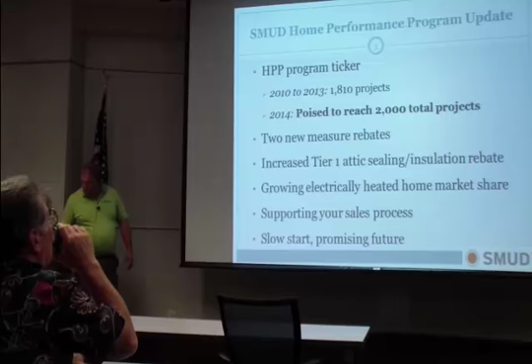All right, so let's go ahead and kick into the presentation. Most of you in the room have been involved with this since probably 2010. You started coming to these meetings when we were doing the grant, the stimulus grant and whatnot. Since then, we've taken care of 1,810 homes through the Home Performance Program, which is no small feat. That's pretty good. We're going to be over 2,000 by the end of the year.

Today we're going to talk about a couple new measures that we're adding into our program, which we think are pretty exciting. We're going to increase the attic air sealing insulation rebate per your suggestions from that survey. We're also wanting to reinforce the fact that we have this electrically heated home market, which is a very viable source of business for you.

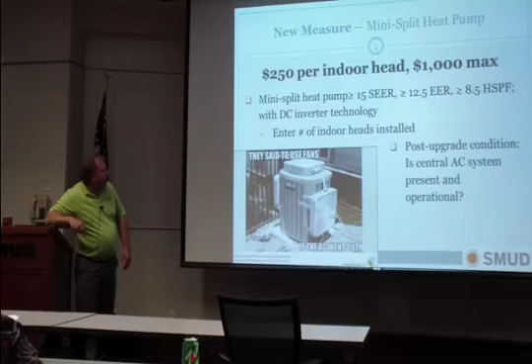Now, if you wish, you can install those as a measure under the home performance program only. So for anybody that wants to put one in, we're doing $250 with a max of 4 heads. You can, of course, put more heads in if that's what the house needs, but this is what we're going to max the rebate at—$1,000. There's the requirements. We're pretty excited about this.

We think that this actually fits a nice little niche in the market. So I'm hoping that those of you aware of mini splits should be pretty tickled pink right now, because now you can offer this as part of the home performance package. And I think you're going to have extremely happy customers if you do so.

It is strictly home performance at this time. We are in the process of trying to open this up to what we call our standalone rebate program, like the regular air conditioning program. But the one thing some of you may have figured out is that nothing really happens fast at SMUD. It takes time—there's an enormous amount of stuff we have to do and line up the ducks that need to be in rows before things happen. But because the home performance program is pretty quick and able to do things relatively fast, thanks to the excellent efforts of the team, we are able to do this.

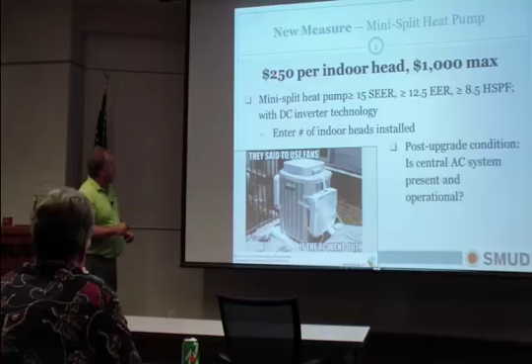Now, that's going to only be $200 for the standalone program, but you're probably still, we're going to miss the summer—I'm going to be honest, we're going to miss the summer for your standalone. But one of the things that those of you really closely paying attention may have noticed is that every time SMUD has anything to do with rebates, we always make it better to be a home performance contractor than a standalone contractor.

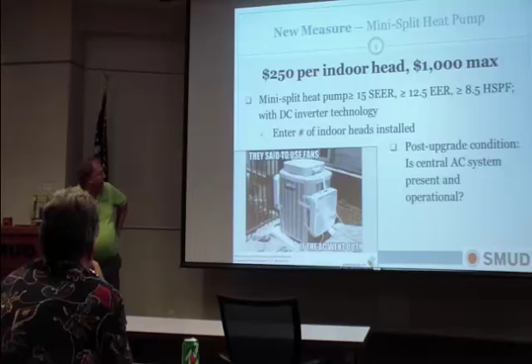There's a perfect example right there - $50 more for it. So I hope that helps.

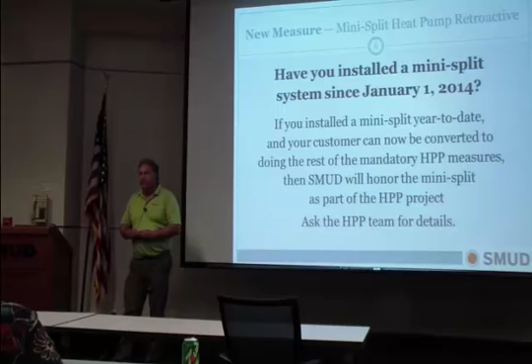Now, just to sweeten the pot a little more: for those of you who routinely do these jobs, if you've done one and you're able to get your customer to go back and do the HPP measures, the insulation, and if they have an existing duct system, that still needs to be sealed because they're probably still going to use their central heat, and even if not, it acts as a hole in the house, so we want that sealed. So the normal HPP stuff - we'll add the mini split into whatever rebate the new job develops. So I'm thinking that's worth a few phone calls.

Anybody that's done those? All of a sudden you get some money back.

There's a bit more detail, a lot more detail on that, on how to do it. You can look back, or contact Rebecca if you have any questions on that.

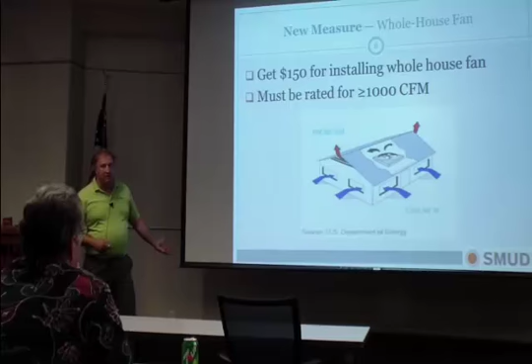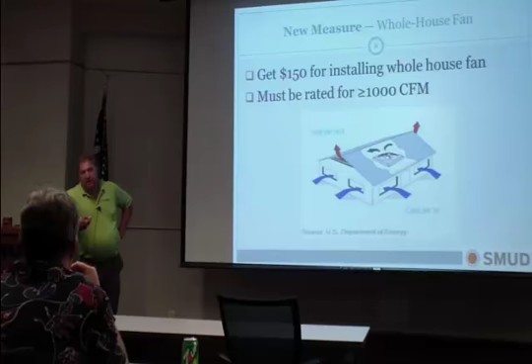So another new measure I'm excited about, because I live and die by mine, is the whole house fan. SMUD has had a whole house fan rebate for a long time of $100. Lots of people are putting these in. Those of you with BPI experience are probably churning right now thinking, how can we do this under home performance? Well, it's true - BPI doesn't believe in whole house fans, but BPI is based in New York, where I'm not so sure they're as viable as they are here. Since I live and die by mine, I'm totally behind this measure.

The only thing I'd suggest is maybe working in some form of winter sealing, some way. There are companies that make an R38 cover for the whole house fan - excellent. Might you consider giving a larger rebate if they seal to R38? They are more expensive, but we'll take that into consideration.

The new whole house fans are not like that old style. I agree, not even close - they're incredibly more energy efficient. The grill is smaller, the motor itself is suspended, it already has dampers on it, and you don't lose nearly as much energy.

We didn't have a picture of that, Dave, so we're using this picture most folks can relate to. If you guys want to install that other kind he's talking about, by all means - it just has to move more than 1,000 cubic feet per minute. That should be pretty easy, and I hope you guys can get out there and knock that out.

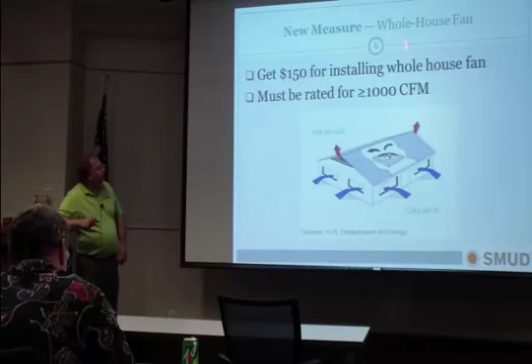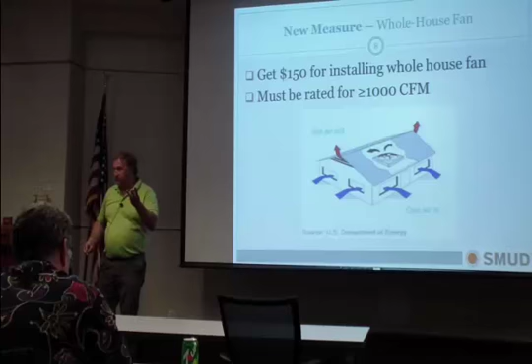We didn't talk about it, but Dave met with me this morning - sometimes they put multiples in a house. I'm okay with that, we can do multiples, but we didn't think about that in advance because most people just put one in, and Dave said he's got 3. That's the rules - I can see how a big house would need that now.

So, okay, anybody excited about that besides me? Yeah, well, all right - hey Jim.

Yes sir, I put 3 in my house - one because if I shut my door I wouldn't have any airflow from it, right? But I put mine in in June of 2012, and my bill that month, same number of days, I saved $143 over the year before. Nice, by putting it in - unbelievable difference. I haven't run my air conditioning this year at all. Oh fantastic, your house is comfortable, obviously. Very much so. Right on.

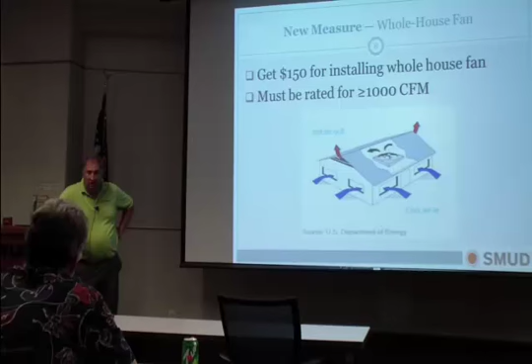So you saved $140-something in PG&E territory, right? But I have friends who have the whole house fan without doing all the other measures, and they're not even close to being as efficient. Okay, great. So you should be a company that's all over this, right, doing all the rest of the HPP stuff. Right on.

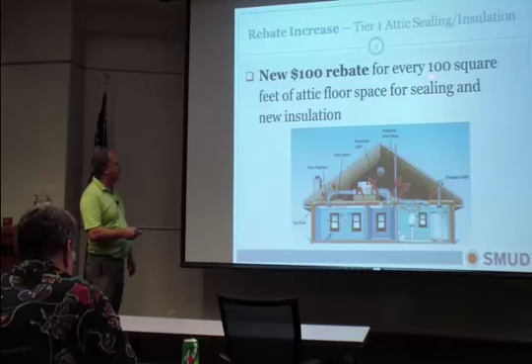Okay, so during our survey that most of you responded to, one of the things that rattled my cage was you guys talking about the attic insulation rebates still not being quite enough. We were at $60 per 100 square feet, so we bumped it up for tier 1. You remove the original insulation, seal the floor of the attic, and put in new R38 - we bumped that to $100. So it's 100 for 100, pretty easy to remember. Hopefully that will help you sell a few more jobs.

So that's an increase.

Rebecca has stuff here. What do we got? Yeah, we can skip that. Oh, we can skip that. I can revisit it. Okay.

All right, so this isn't new. This is what we've done previously. But we did double the HVAC and envelope rebates for the electric heated houses.

So I think this is pretty interesting. Those of you that are making an effort to market in the right areas, we're seeing a huge increase in all-electric customers, which of course, being SMUD, we know that they're our bread and butter, and they like us, and they want us to help them. And I think we are. So you can see we're doing pretty darn good. I just encourage you to continue working in the electric heated areas, which we're going to go over in this presentation, but we did already provide you with a really killer map that should help focus that area.

This I found interesting. This number right here is an average of what we're paying for an all-electric rebate. If you take the ones with gas, the average PG&E rebate is about $1,254. So when you add $1,254 to that, it still comes in about $600 less than what we're doing for our electric homes. So that's a huge rebate that we are paying.

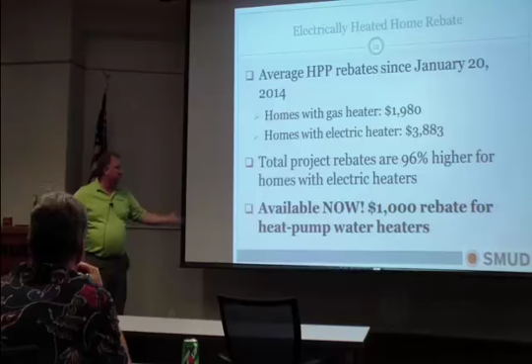All right, we threw this on here too, because we're not getting very many home performance contractors installing heat pump water heaters, but for the electric customer, the heat pump water heater is just a gold mine. It's a fairly easy install. We have a $1,000 rebate for it, which is huge. We have a standalone program also that's doing a $1,000 rebate, and we decided that was one of those cases where HPP wasn't better than our standalone, so we brought that up for this presentation in this meeting. So anybody that has an electric water heater out there, get a $1,000 rebate.

Now, we're going to carry the $1,000 through home performance, but it's dropping down to $800 for the standalone at the end of July. So if you're inclined to install water heaters and not do all the rest of the HPP stuff, remember that you can do that and get an $800 rebate for your customer after July 31st, or $1,000 if you do it before then. So I just wanted to make sure you realize that is available, and I would love to see these under HPP.

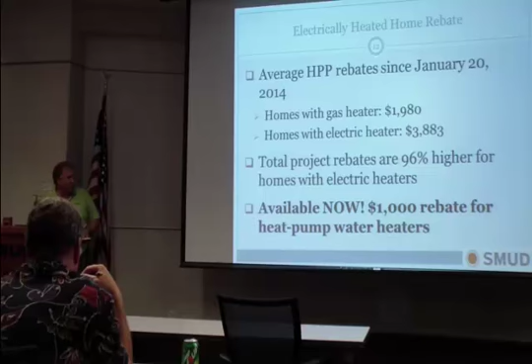So this is kind of getting to what Bob was talking about. It's a little bit confusing on one hand, and the idea here is that in 2011, when we started this federal grant stimulus stuff, part of it was to stimulate the economy, and SMUD was picking up $400 of each audit to go out and do it. So you guys agreed that you would do it for $400. Well, now we're back to ratepayer money paying for that assessment fee of $150. We've kind of gotten to the point where we've really had this question: is this a valuable use of the ratepayers' money?

Is it a valuable cost to them, to the customer, to pay $250 plus up to $400 for an energy audit? We've done this work so long, and I talk to people on the phone all day long, and right over the phone I can tell them whether they are a good candidate for HPP or not. I think most of you could go into the house, look at the house, look at the equipment, poke your head up into the area, look at the ducts. Without doing a full test-in, you would have a 99% chance of knowing whether that's a good job or not. And we make this an option.

So we're changing the way we're doing things. You can still do an energy audit at the beginning, before you're in contract, like you've been doing. We piloted this with 3 contractors, and honestly, we had mixed reviews. So it was inconclusive whether this is a good thing or not, but that's why we're making it an option. So I want to be completely clear: you can still do it status quo, do the $150. You get $150 from me, do an energy audit the way you've been doing it.

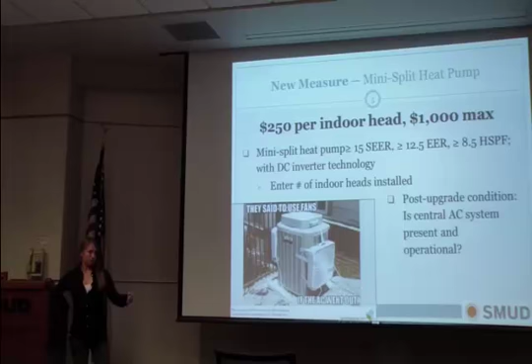I'm really excited about the work we've done to improve the rebates for homes with electric heaters. I think that's a very big market. You'll see in your packet there's some maps showing where those neighborhoods are. One of those is the Pocket, which historically has pretty good density of projects and a fairly high-income group. Everybody go out and pound that pavement. The other cool thing is that if the home isn't necessarily all electric heat but is all electric, then you're not spending money on CAS testing.

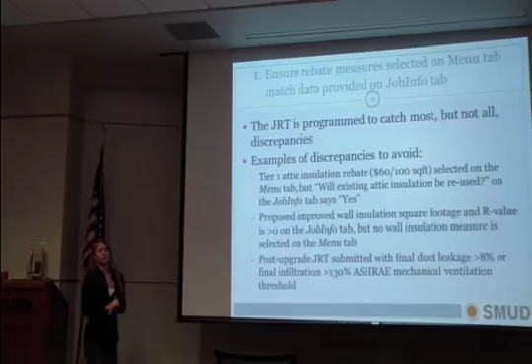My unpleasant job is to mention what the contractors and their fantastic people could be doing better. I want to lead off by saying that the quality of work we've been receiving has been, for the most part, with very few exceptions, extremely stellar. You guys are getting it, especially my high-volume contractors and those who work with professional paperwork people. It's been extremely successful, very little need for back and forth or revisions.

Usually when things aren't going well, it's because there's a new staff member who just needs to be trained up. I love working with new people, and I have a teammate back in BKI in Oakland right now named Michael, who's also helping me work with contractor implementers who are uploading submissions to get them trained up, so that we're not wasting your time with back and forth.

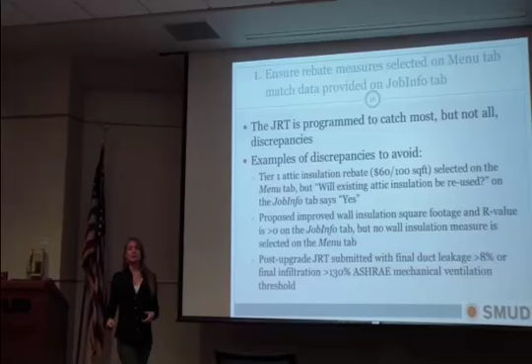But here are some examples of things that tend to hold a project up on the pre-retrofit review side or the post-retrofit review side.

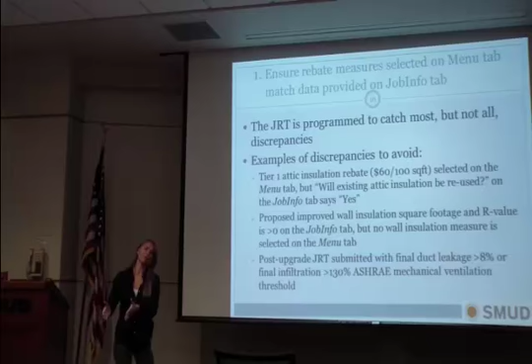This is out of date - that should say $100 per 100 square feet. I wrote this before we made that change. Just keep an eye out to make sure that the info on the menu tab matches the info on the job info tab. So if you're saying you're going to reuse the insulation, don't pick the tier 1 attic insulation rebate, because that means you will be replacing it. Just make sure that stuff adds up. For the most part, I've built the JRT to catch those discrepancies, but I haven't programmed all of them in there.

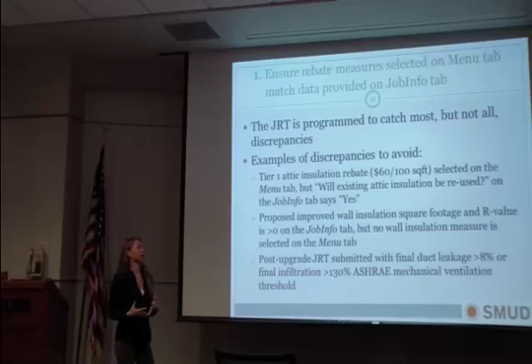Again, make sure the information matches up - these are examples, and you can read them off the website.

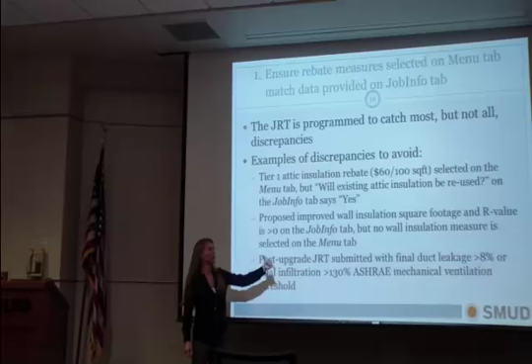Make sure that the final duct leakage is less than or equal to 8%. Here's an example of a problem. Don't give me a post that has duct leakage over 8%, or air sealing that doesn't meet the target, unless there is a good reason for it - and go ahead and start that conversation with me. But don't just submit something that has 10% duct leakage and expect to get a rebate without a little bit of explanation.

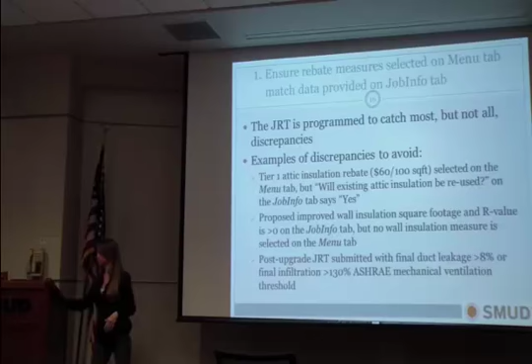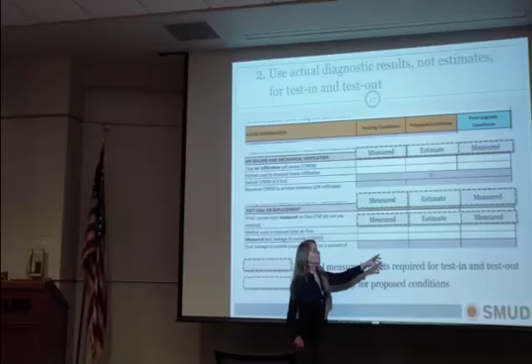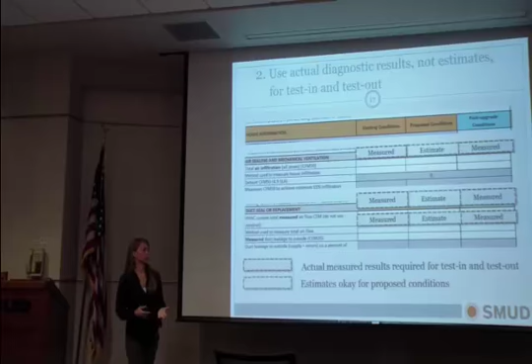Give me actual measured numbers for pre and post. It's okay if this is an estimate, but if I see 800 here, chances are that's not an actual measured number. We want to see the actual measured numbers - A, because you should be doing the test anyway, and B, because if you're doing financing, they legally require the real numbers, not just estimates of those diagnostics.

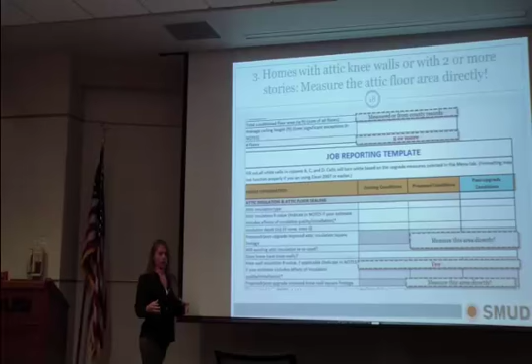If your home has knee walls or 2 or more floors, measure the attic floor area directly. A common problem I see is that the total floor area of the home is 2,000 feet, and the attic floor area is also listed as 2,000 feet, but it's a 2-story home.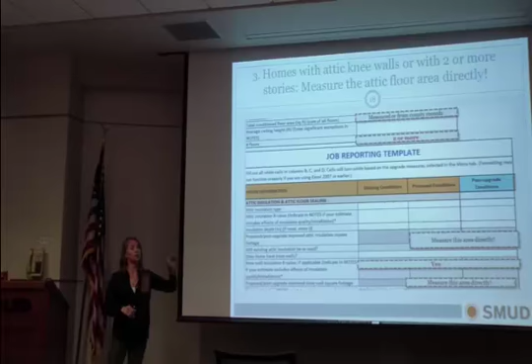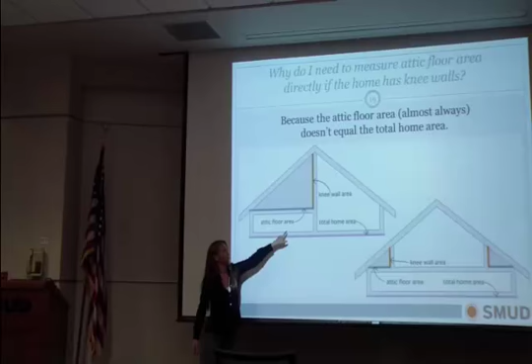I have some pictures showing why most of the time it's impossible for the attic floor area to equal the total home area if the home has a knee wall. There is an exception, and I made a little diagram of that. This is the attic floor area, this is the total home area - those are not equal. This is the attic floor area in blue, total home area in purple - not equal. So if the home has knee walls, there's a good chance that the attic floor area is less than the total floor area.

Why does it matter? Because the rebate values are contingent upon the amount of attic floor area you're upgrading, and we can't spend ratepayer money on upgrades that didn't actually happen. So we're pretty particular about spending rebate money.

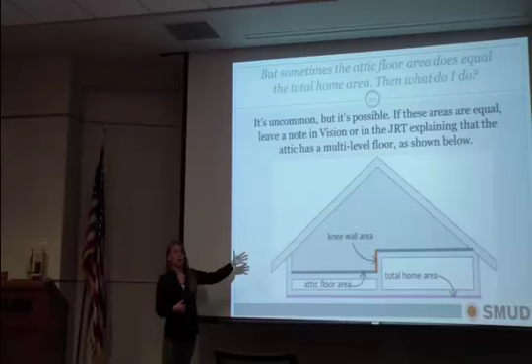Here's an example of where the attic floor area would equal the total home area, even though there's a knee wall. This is fairly rare, but it's possible. So if you're going to submit something where the attic floor area equals the total home area, and there's a knee wall, reference this picture and I'll know what you're talking about, and that way I won't send it back to you with a question.

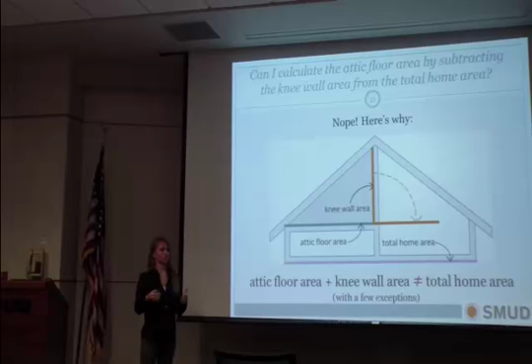Can I calculate the attic floor area by subtracting the knee wall area from the total home area? No. This is actually something I've gotten sometimes when people are a little new to the process. I know before being part of this program, I've never been in an attic. It's been in the last 3 years that I've really understood how attics work.

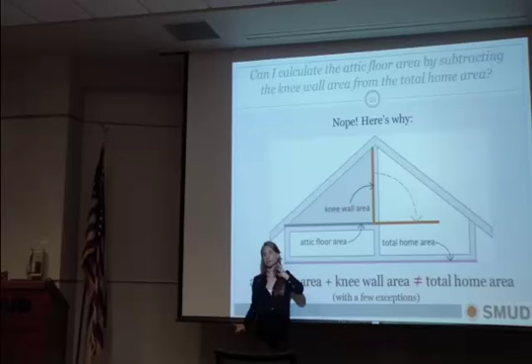But anyway, this is just a little diagram to show you that unless your roof line is at a 45-degree pitch, this knee wall area is not simply going to be this minus this - it's usually going to be smaller. Again, the reason it matters is because the rebate value is tied to that area, and we need to make sure that we're spending ratepayer money on legitimate upgrades.

Deep buried duct photos, and I've titled this "The Good, the Bad, and the Incomplete."

It turns out Jim Knowles has never seen the good, the bad, the ugly. That really disappointed me.

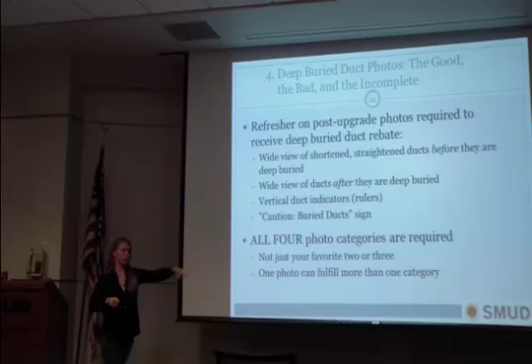Just a refresher on the post-upgrade photos we need of the deep buried ducts. We want a view of the ducts before they're buried - that's the one we're usually missing. We want to see that they've been shortened and straightened so there aren't unnecessary kinks. You're not spending extra area - the shortest distance between point A and point B is a straight line. If you're adding duct area, you're providing more opportunities for leaks, more surface area through which hot air escapes or hot air penetrates in the cooling months. We want to see that they're shortened and straight. We want to see the vertical duct indicators so people don't accidentally step on the ducts, and we want to see a cautionary duct sign to prevent that safety issue. All 4 of those, not just your favorite 2 or 3, as people are going to see all 4.

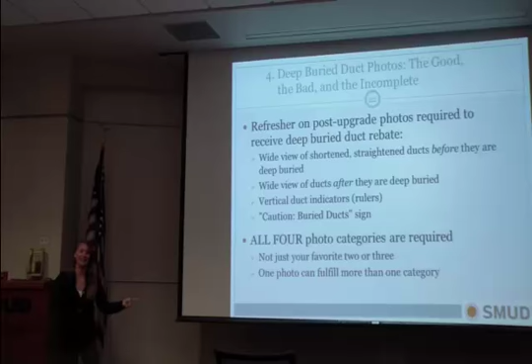I'm going to attempt to be a little bit more stringent on that.

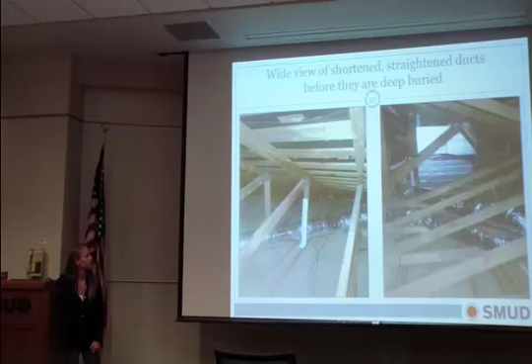Here are some views after they've been buried. We're not looking for Ansel Adams here - it doesn't have to be beautifully lit. We understand that, especially with the short focal lens, you're going to get some distortion. That's fine, you get flash, you get ugly stuff. It doesn't need to be gorgeous, it just needs to show us the information that we're looking for.

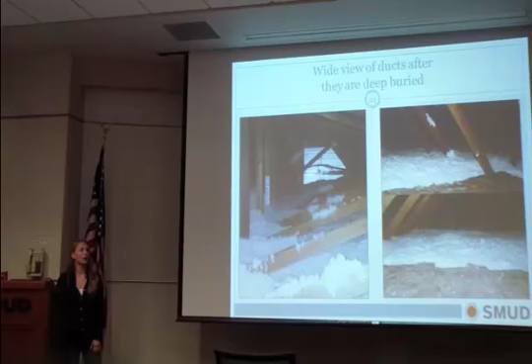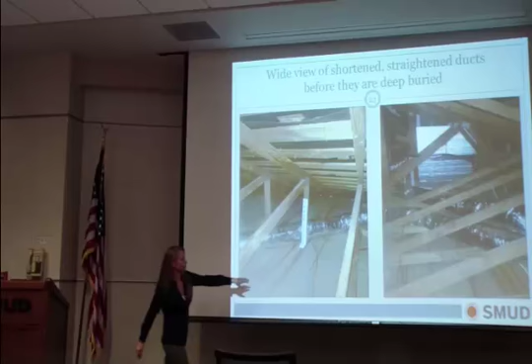Can I get you to back up for just a second? Yeah, slide back. Why is the ruler - see what they've done to the ruler? Oh, is it on the 2x4? Yeah, they're cheating 2 inches, aren't they? Well, to be fair, 3.5 inches since this is a vertical 2x4. Oh, you know what they did - they folded it. Yeah, it's folded because it's the 2x4. Yeah, see, it's cut, it's folded at the 3.5. Just checking it. Yeah, they thought ahead.

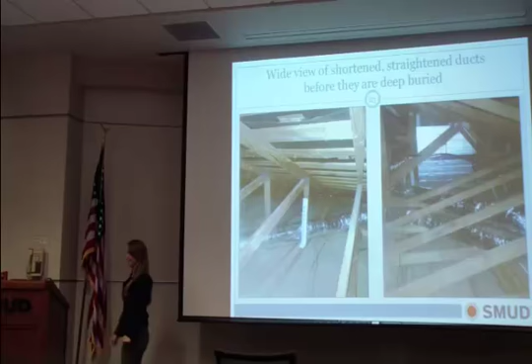Good job, Dan. Okay, I think these were Pump City photos. Again, some vertical duct indicators. I'm trying to show the diversity - again, it doesn't need to look good, it doesn't need to look like it came off Better Homes and Gardens, it just needs to show us the information.

Caution buried ducts - you can use the template. You don't have to, it's up to you.

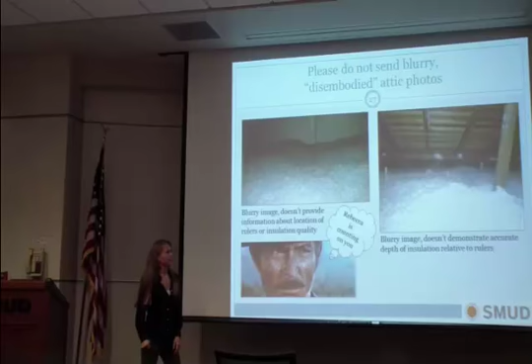I haven't seen that little speech bubble on Van Cleef. These photos are less helpful to me - they're blurry, they're kind of not really showing me exactly what's going on. It doesn't show the accurate depth of the insulation relative to the rulers. The other thing is that this came with a batch of better pictures, so if you have 5 pictures and 4 of them are great and the 5th one looks like this, you can keep that, I don't need it. But this was the bad, I think, right?

The last thing is on your rebate applications and on the JRTs. I know that most people in this room have fun and make money by doing good field work, but in order to pay you for your good field work, you need to have good paperwork. It's not exciting. Companies that can have a designated person for that usually need an office, and that's a good model if you can afford it. If you can't, I love talking to people and helping them, and my coworker Mike does too. So in order to help you get your rebate faster and help your customer get the rebate faster, if it's going straight to them, make sure the actual SMUD account holder is listed in the JRT where appropriate and is listed on the rebate application. If there's a mismatch between the name you give me and the name in SMUD's database, that slows things down. And I do rebate batches every 2 weeks, so if at the last minute I notice a mismatch, you got to wait until 2 weeks later before you get your money.

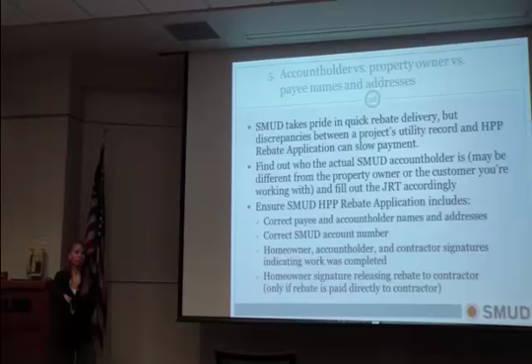But again, I want to cap this off by saying that the level of quality is very good, and I'm continually impressed, especially when we have people newer to the program, how hard people work to get it right, and 95% of the time they do.

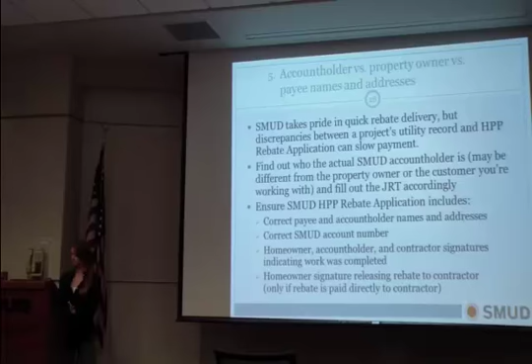Okay, any questions, especially about JRT stuff? I'm the evil genius behind the job reporting template. Any burning problems with that?

Oh no, it's just the end. Not a burning problem, but I would reiterate what Rebecca said, making sure those service IDs are correct on the initial submission is the bonus in terms of making your rebate process go smoothly.

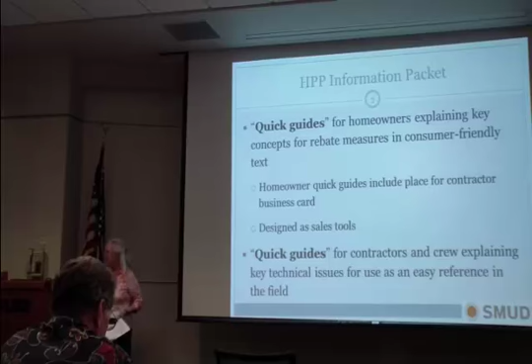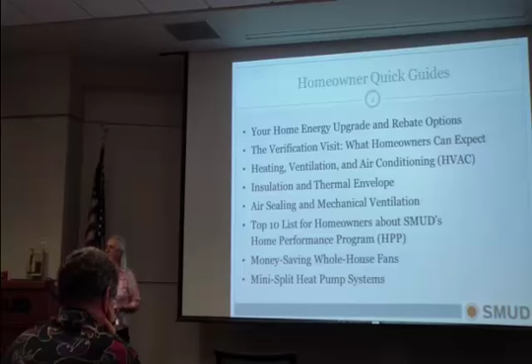In your packet for the homeowner guides, we've included this list of measures, and I wanted to point out that the money-saving household whole house fans and mini-split heat pump fact sheets are in there to support the new measures we have. Again, these are focused toward the homeowner to help explain and validate the benefits of these measures, because the educational materials coming from SMUD are from an independent third party to support their sales process.

The first one I want to talk about is a fact sheet that walks through examples of how the SMUD program and the PG&E Home Upgrade program can be integrated for overall value to the customer. There are 5 examples here, and that's what they are—examples of how it works. But in fact, the process of integrating the 2 rebate programs can be applied to any project scope where you have measures within these 2 programs. These don't represent set packages; they represent examples of how to think about leveraging the two rebate programs to add value to the project. In this example, you see a modestly priced project with some very basic measures.

We go to the next example. There's been an upgrade in the attic insulation, an upgrade in the AC unit, and so that leads to an upgrade in the price.

But for each one of these measures, you can see that there is an opportunity from both programs to provide an incentive value to the customer. Here's a mid-range project with 3 base measures from home upgrade, and we've added deep buried ducts to this scenario. Again, each of these measures has a double value under the combined programs.

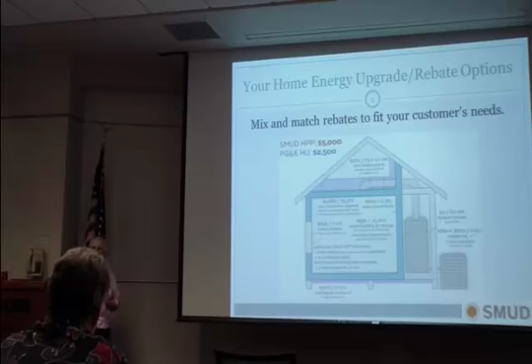So the team is very happy to answer any questions as you develop a project scope about how to work the 2 rebate programs for a combined value for your customer. We wanted to make sure this fact sheet is well understood and is a resource of ideas about how to leverage the 2 rebate programs together, because customers in Sacramento really have a lot of opportunity because of the combination of Home Upgrade and the SMUD program.

A question? Yes, was it me? No, you. I was just curious, do you guys have an Excel sheet that would help us make proposals? Because we have EUC rebates and you have SMUD rebates, and some measures are prorated depending on whether it's more gas or electric related, so there's a formula to do that. I was just wondering if there's an easier way to do it.

I haven't put that together yet. I would love to work with you and other contractors to develop a template for that. I could even put something together where you insert your logo, fill it in, and it puts it out in a presentation-friendly format. I'll have to ask the holders of the purse strings, but I think that would be worthwhile.

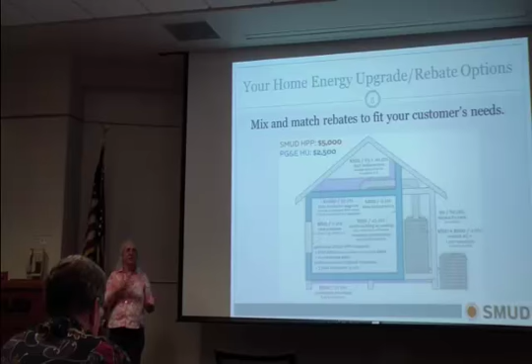That'd be great, because I don't want to get in trouble if I overshoot an estimate, and then I'm worried about how I'm going to get paid. Yeah, that'd be great. I love that idea, that's awesome. Yeah, we'd be happy to do that, because this really is a great opportunity in this area, having the 2 programs working together. There's a lot of value there, so thank you for the excellent suggestion. We'll follow up on that. Any way we can make it easier for you to use these opportunities, we're open to the ideas.

So moving on to some of the other information in the homeowner packet. I haven't highlighted everything, but just a few of the things in there that could be helpful in answering homeowner questions.

There's a description of what a verification visit is. This is a way where you can explain it, but the homeowner can have more details they can go back and understand or read through later. So this is in there. All of this is PDF format, downloadable from the website, so it's ready for use.

As I mentioned, key services, measures, ideas. Here's a consumer-friendly fact sheet on HVAC and the basics of what the system is and the opportunities for energy savings. Insulation and thermal envelope—again, an easy tool to express this idea to a customer and leave them with something they can consult later when they're thinking about what they've learned.

Air sealing and mechanical ventilation, another great consumer-friendly tool you can leave with the consumer. Each of these fact sheets has a place on the back side where the company card can be stapled or attached so that your brand is on the fact sheet. This is an opportunity to leave the customer with some good reading material to inspire them.

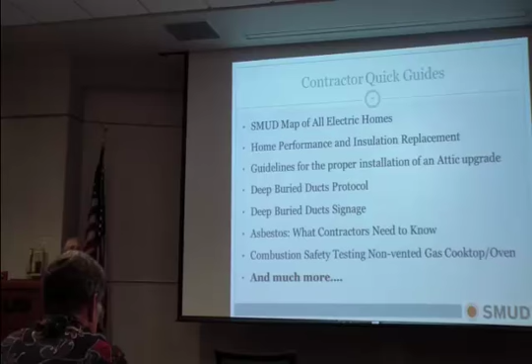And then frequently asked questions about the program. This would also be helpful for staff and crew if they're being asked questions by homeowners as they interact with them, either during the sales process or on the project. So this is another good resource both for homeowners and contractors. Then you also have a contractor packet, focused more on the technical side and the implementation side.

Just a couple highlights from the list, but there's full instructions on deep buried ducts. This might be good to have in the folder in the truck at the job site, in case you have a new crew member or someone has a question and wants a refresher, it's right there. We also have a template for the deep buried ducts sign that can be customized to your company.

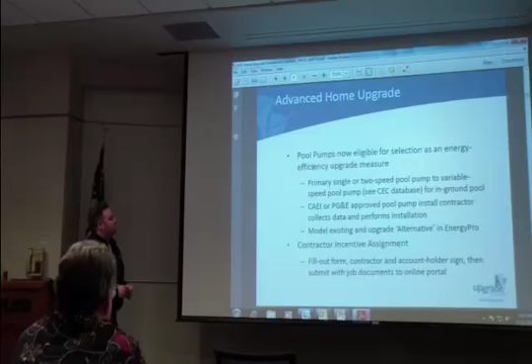So Advanced Home Upgrade and Home Upgrade both have their own updates and questions at the end. So Advanced Home Upgrade: pool pumps are now eligible as a selection for the energy efficiency upgrade measure, and Advanced Home Upgrade is modelable in EnergyPro. We ran a couple of webinars specifically on how we expect to see that happen, and there are slides available on the document library on our website.

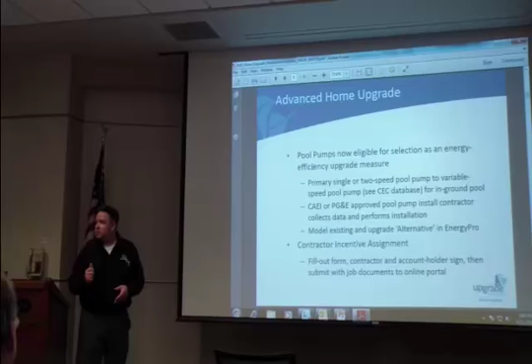We can also help walk anyone through it who is interested in providing that service within PG&E service territory. If you're in SMUD territory, you guys have a couple bundles for pumps. You wouldn't cover both, right, exactly. But anyone doing work outside Sacramento County, you'd be able to offer that to your clients as well.

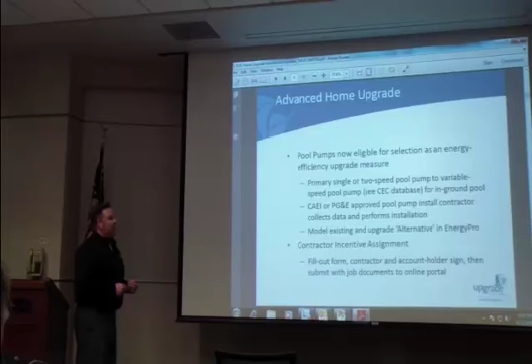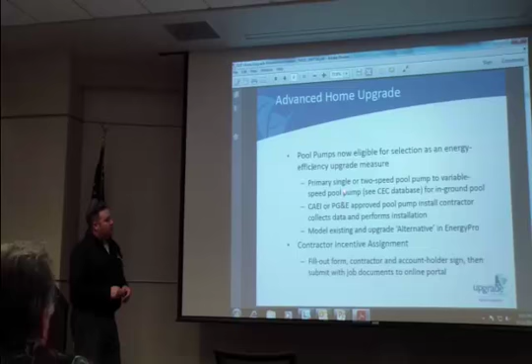And then, the program is obviously limited to either switching out from a primary single or two-speed pool pump to a variable speed pool pump. It's something that's already in the CEC's database, and it's for in-ground pools only. We've had questions in the past about jacuzzis.

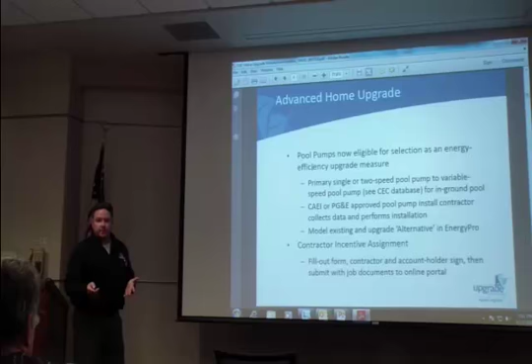They are not eligible. Contractor incentive assignment is available now, so there's a form to fill out that you can download from the website and submit with advanced home upgrade projects. If you want to have the rebate reassigned to you, the contractor, you need to have the account holder's signature, but it's simple, you submit it with the rest of the documentation.

And then there's a change, as Chris alluded to earlier, coming to the proposed incentive calculation for advanced home upgrade, which is that a disposition from the CPUC will be applied to the savings on both the electric side and the gas side, and it varies, that modifier varies by space conditioning type, so either heating and cooled home or heating only. They have different modifiers applied to them.

So what comes out of the Energy Pro model, you get a modifier applied to it, but then you also get a bonus in every case that there is savings reported out of Energy Pro. You get bonuses for kilowatt hours and therms saved. Currently they have a cap, right, so it's up to $6,500 right now. But in the future, they're looking at potentially lifting that cap so that those that are the biggest consumers are incentivized to do more broad, deep, holistic upgrades.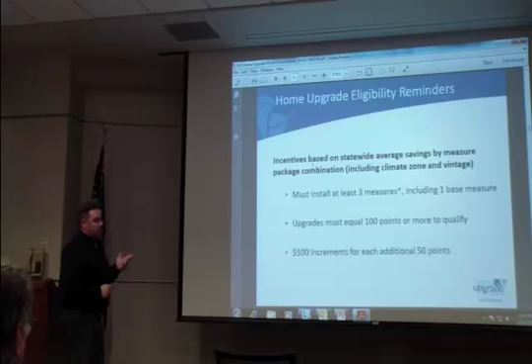The home upgrade eligibility reminders, I wanted to bring a few of these in. So the structure did not really change, just new measures and points have been added on. You still have to install 3 measures, including one base measure. The upgrades must total 100 points minimum to qualify, and it goes up in $500 increments at every 50 points.

A couple things I wanted to reiterate and emphasize as far as requirements for home upgrade in PG&E service territory: selecting an equipment-based flex measure. You have your one base measure already required, which is either insulation and air sealing or duct sealing. If any of the next 2 measures are an equipment-based measure, so AC, furnace, water heater, the 3rd measure must be a non-equipment-based or flex measure, so more duct or air sealing or insulation.

You can still have HVAC in its entirety, so AC and furnace on the same project, but then there would be a minimum of 4 measures in those cases. The whole idea behind this is that it's not an HVAC change-out element program.

Equipment upgrades must be like for like. At test-in, in order to be upgraded, it's got to be the same type of equipment. So it's got to be AC to AC, gas furnace to gas furnace, gas water heater to a more efficient version of that for testing. They really don't want to incentivize fuel switching. They can't actually, so those were rejected.

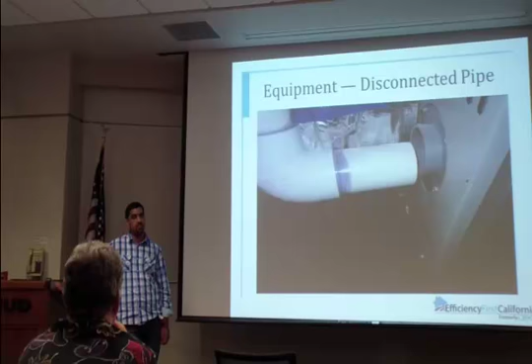I don't know if you guys heard about that in Lake Tahoe, where a contractor actually tried to cut corners. They ended up killing both homeowners, and now they are being charged with involuntary manslaughter.

Was he paid before that happened or after? Was he paid? Never mind.

So that's pretty much it.

It's not required by code that the intake be taken out of the combustion appliance zone. We prefer to see the intake running all the way to the outside. This is not code, it's not required, but it's best practice to have the intake running all the way to the outside, versus having a second air source out of the combustion appliance zone, which could cause many things, including backdrafting or depressurizing your home.

Missing insulation. This knee wall is part of the attic upgrade. It needs to be insulated to R19, and the attic to R38. We've been singing that song for a long time now, and I still see this happening in the field.

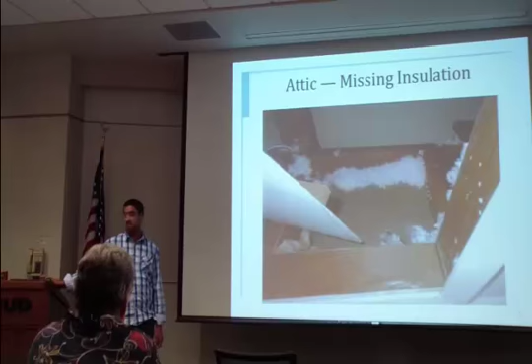Same thing here. Attic knee wall is not insulated. So please insulate it to R19.

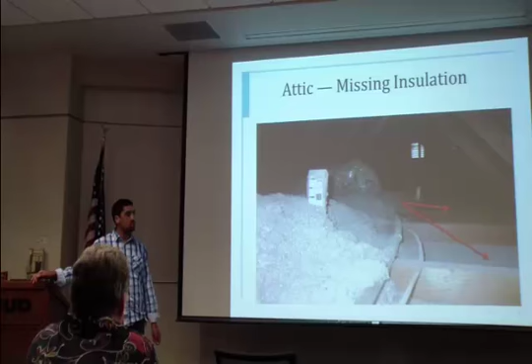Here's some more missing insulation. This is not a garage, it's part of the attic, and it has not been insulated. So please make sure to check after your installers to make sure they do a good job.

Ductwork. There are 3 main things to remember about ducts. The best ductwork is duct that is short, straight, and deep buried. Anything else creates restriction of the airflow and friction loss as well. So short, straight, and deep buried is the best ductwork.

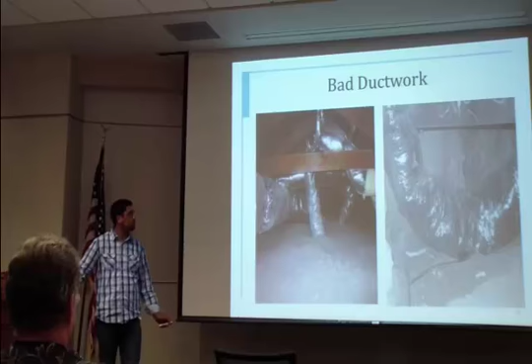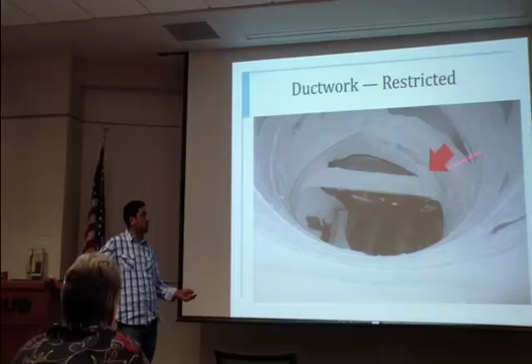This is interesting. Someone installed the supply register with a stud right here. This creates a problem for the efficiency of the furnace, airflow restriction, and comfort, and you're losing money when you have all this restriction.

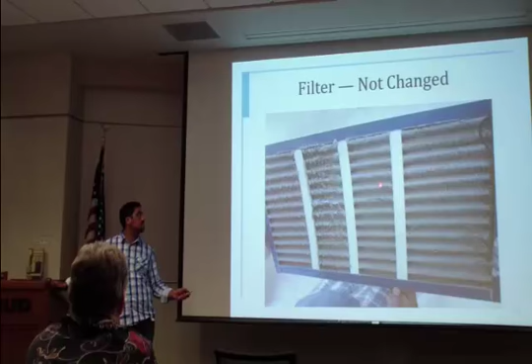Dirty filters. This was a job where the furnace was changed out. I went there about 10 days after, and look at the filter - it was not changed. And the 1973 gas line also needs to be changed. Even if you do not touch the furnace or water heater, if it's not part of the work scope and you see a 1973 line, there's going to be a corrective action for this if you don't change it. So you better let your customers know that they need to replace that.

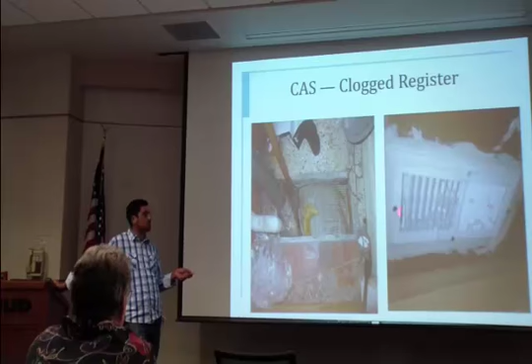Some restriction here. This is a CAS, a combustion appliance zone with natural draft, and you see the insulation is plugging the CVA combustion ventilation air. So there's no air coming in through the CVA, so it's sucking air out of the main body of the home instead. This should not happen again - this should be dammed so the insulation doesn't plug the registers.

When you see spillage - I've seen some cases where contractors reported spillage but didn't fix it. If you cannot fix the spillage, you are required to call GSR and have them come try to fix it, or they will shut it off. So you are responsible to call GSR in those cases as well, even if you're not going to be upgrading the appliances.

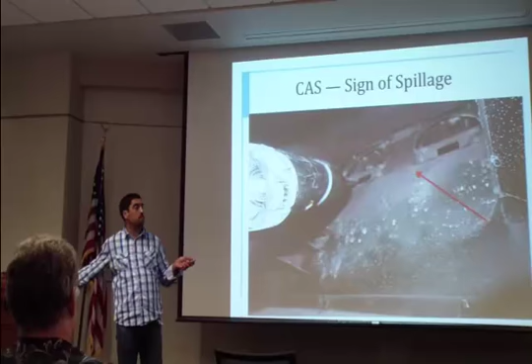This is a draft test, and it was left uncapped like that, and that's also not acceptable. That should be sealed with something that works better than just the stat cap.

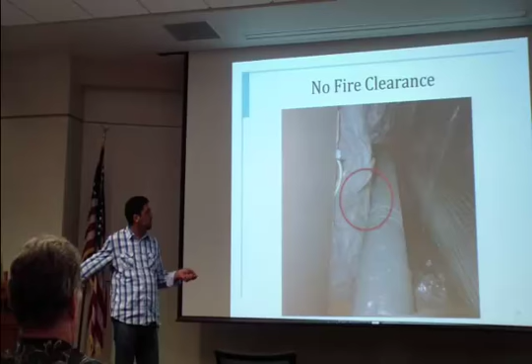Again, this is fire clearance. So this is single wall, 6 inches clearance.

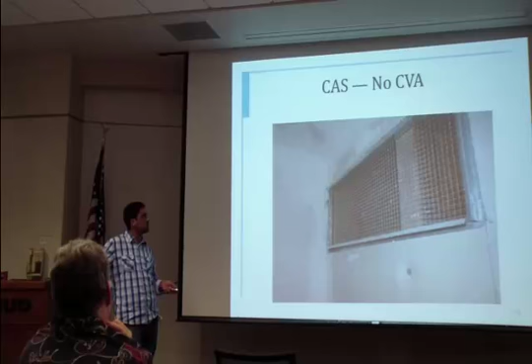This contractor was thinking he was doing a good job sealing this CVA, combustion ventilation air. This here was a furnace, induced furnace, and natural draft water heater. So obviously there's no air for them to combust the gas, so they were sucking air out of the house.

So CVA should never be sealed. And fireplaces, it's always good to test fireplaces when you do your worst case. If you have any carbon monoxide level, if it's 1, I would call GSR and have them come check it out. If you cannot fix it, call GSR.

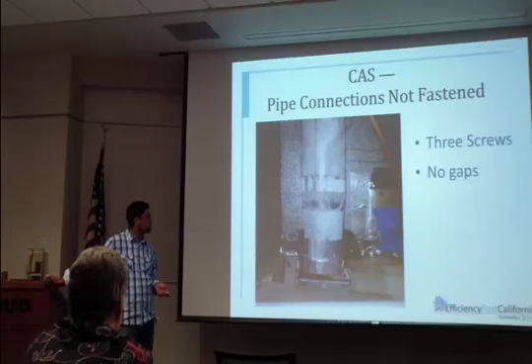Gas leak, same thing. Please make sure that whoever is doing the audits for you really takes the time to test for gas leakage. Per BPI, Building Performance Institute, you run your gas sniffer at 1 inch per second. So take your time to test for gas leakage. Usually when you run it as fast as you can, you're obviously not going to detect it easily. So you do want to take your time.

That's an immediate fail, right? Yeah. So you guys do everything else right, but you forget to tighten that thing or check it, and it's an immediate fail on verification. It's a quick thing to fix, but you have to send a crew back to fix it after, and that costs you money. So it's better to do your job right in the first place.

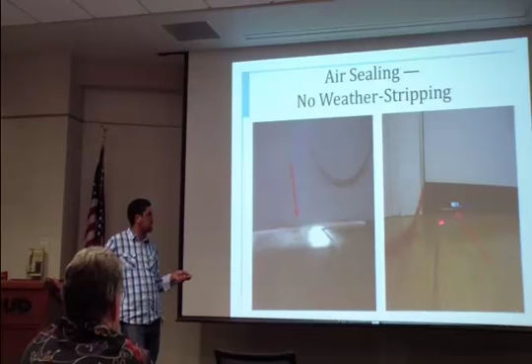We can skip this one, we talked about it. Communication issue - there is a CVA here where the natural draft water heater is, but the contractor forgot to seal the CAS door. There should be no communication between any CAS, combustion appliance zone, and the main body. Same thing here - no communication between the main body, which is your home or living space, and the CAS zone.

We also run our own test center. So any of you who need to recertify for BPI, you could call me and I could walk you through the process. We also do proctor exams for BPI recertification or getting the BPI certification in the first place. Remember, it is required to be a SMUD listed home performance contractor - somebody on staff has to have a valid BPI certification. So please, when you go back, verify that that's still up to date, and check that contractors haven't been removed.

What's the total cost of that? For what? What is that? So it costs you... for both? Yeah, so it would be a $300 application that you fill out and send to BPI. And then we're talking about written exams - it depends how many CEU credits you have, if any. So you can take 50 questions, 100 questions, or none, depending on how many credit units you have. But if you were to come to our office, it would cost you $300 per exam, and if I were to come to you, it would be $550.